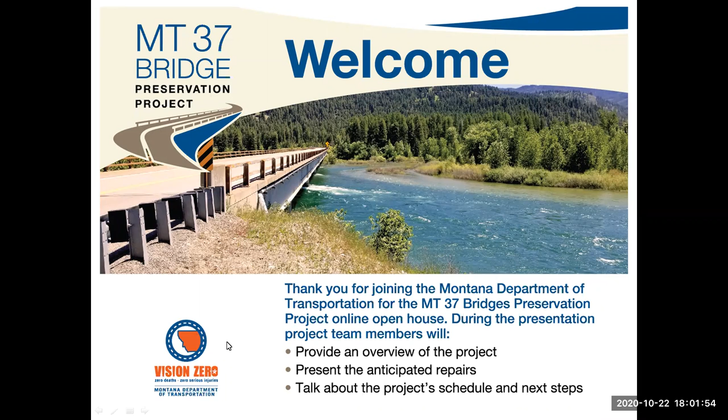Now I'm going to turn over the microphone to the MDT pre-construction engineer from the Missoula District, Jacqueline Smith. Jacqueline? Thank you, Brandon. My name, as Brandon said, is Jacqueline Smith, and I am the pre-construction engineer for the Missoula District. I'm still pretty new to this position and have a lot of learning to do, but very excited to be in this role and be part of this project. So I oversee the pre-construction program for the far western part of the state.

With me today, we have several members of the project team, which consists of MDT, Forsgren Associates, and RBCI. So I'd like to take this moment to let each person identify themselves and what their role is in the project. And then I will go into more information about the mission for MDT and why we have the team we do. So with that, I'm going to start with if the team members from MDT could identify themselves.

Sure, Jacqueline, this is Terry Voller. I work for MDT here in Helena, and I work for the Consultant Design Bureau. And my job is basically to be working with Forsgren and RBCI as a liaison with our Bridge Bureau to make sure that the consultants are giving our Bridge Bureau the product that we're looking for.

Hello, everyone. My name is Andy Carlson. I also work for MDT. I am the Missoula District Bridge Area Engineer, and my job is to just help Terry and help Forsgren make sure that the plans and specifications are to standard with MDT standards. So thank you. Thank you. And Forsgren Associates?

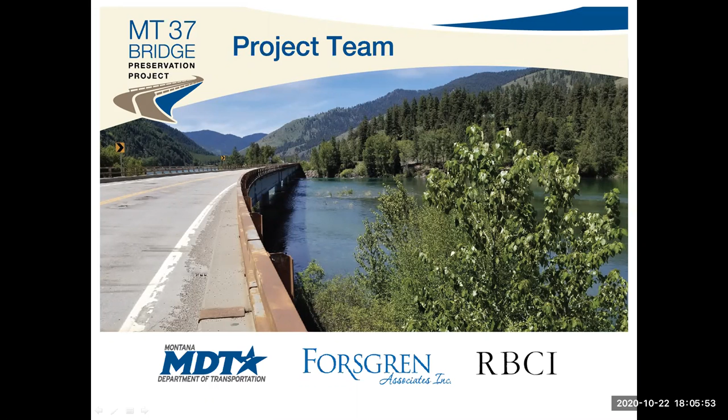With that, I'd like to move on to go into the project overview, and then I'll hand it off to Andy, who will break into more detail. Right now, we are in the early stages of evaluating 11 bridges on Montana 37 between Libby and Eureka. And when I say evaluating, we're looking at what the maintenance needs are for these bridges. They've been built ranging from 1959 to 1974. And so their needs are all different. And we need to look at each one and assess what is the most appropriate fix that's needed for them.

I want to emphasize that these bridges are completely safe to drive on. And this work is more just for routine maintenance, just like you would do with your car. You take it in for an oil change or tire rotation, and you've got your 5,000 mile check every so often, and then you've got your 100,000 mile check as well. So we're just doing our regular maintenance on them once we determine what is the most appropriate solution for them.

We have these 11 bridges, and we've included this project with another project that is south of here. It's about 2 miles south of Noxon on Highway 200. It's a separate project, and we are actually going to tie them in development and construction to see some benefits that we get when we combine projects. And that is we get reduced costs just because of the economy of scale, both with the design, development, and construction. This also allows us an opportunity to maintain consistency in construction and gives us a chance to complete construction in a quicker time frame. With that, I'm going to hand it off to Andy, and he will continue the discussion.

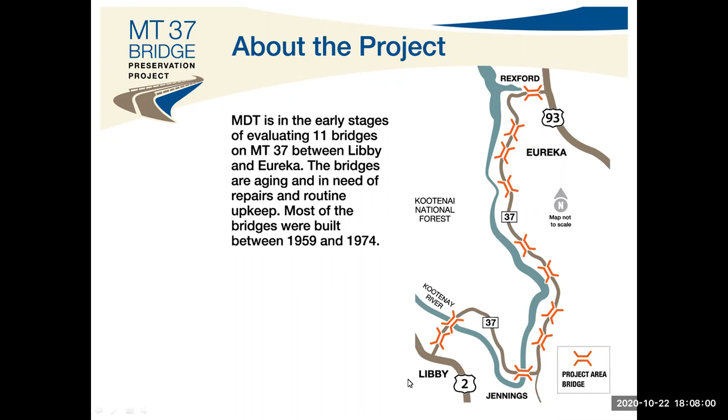Thank you, Jacqueline. Hey, everybody. I'm going to quickly walk through the project's process and anticipated schedule. It was decided to organize the project schedule and process into a two-phase approach, an evaluation phase and a design phase. The evaluation stage started earlier this year and included office and field evaluations of each bridge. All of the information from the evaluations was carefully considered to develop repair and rehabilitation needs and was documented in a draft bridge report. The intent of this public meeting is to share the findings and recommendations in the draft report with the public and request public comments.

The next step will be to finalize the bridge evaluation report. In the final report, there will be a section that documents the public comments from today and discusses any items that MDT should consider during the design process. The design phase is anticipated to start in the beginning of 2021 and is anticipated to be completed later that year. In the design phase, the construction plans will be developed. The design phase will also include an opportunity for the public to comment prior to final design. The current schedule suggests that the earliest construction could occur is in 2022. However, the funding for this project is not available in 2022, so construction will likely occur at some point beyond that.

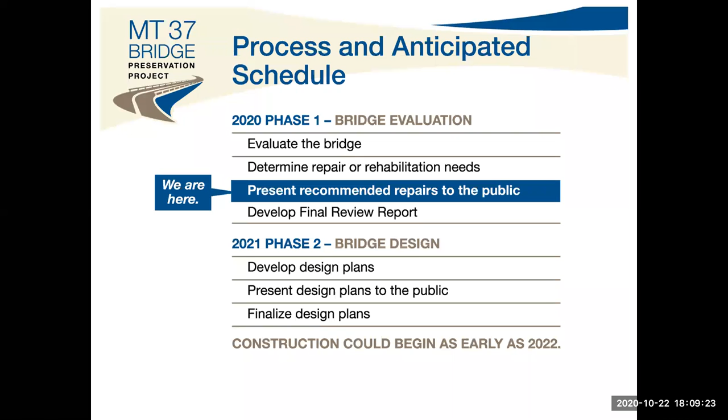All right. While I still have the stage, I also wanted to touch briefly on MDT's Bridge Bureau organization and the services we provide. The MDT Bridge Bureau is tasked with keeping Montana's bridges safe, resilient, economical, and reliable. Similar to this project's two-phase development approach, the Bridge Bureau is organized into two sections, the Bridge Management section and the Bridge Design section. MDT's Bridge Management section provides condition inspection and load rating evaluation for the 5,000 plus public bridges in the state. The Bridge Management section also evaluates and analyzes overweight permit loads and performs bridge maintenance on state-owned structures.

MDT's Bridge Design section provides design and engineering management on bridge replacement, rehabilitation, and preservation projects. The Bridge Design section also establishes and maintains design criteria and standards, participates in research projects, and promotes design initiatives to improve bridge performance and value.

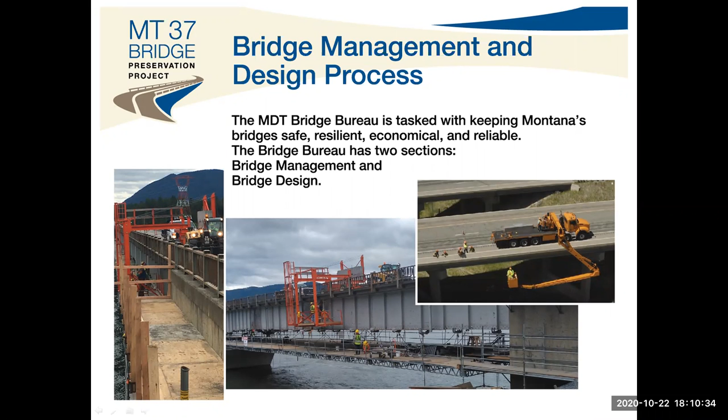Our firm was tasked with performing field visits to each of the 11 bridges on Montana 37, reviewing that field data along with other data provided by MDT, such as inspection reports, and then determining whether the bridges need a patch and overlay or a deck replacement type of repair. We are then tasked with preparing the plans package for the work to be done by a contractor.

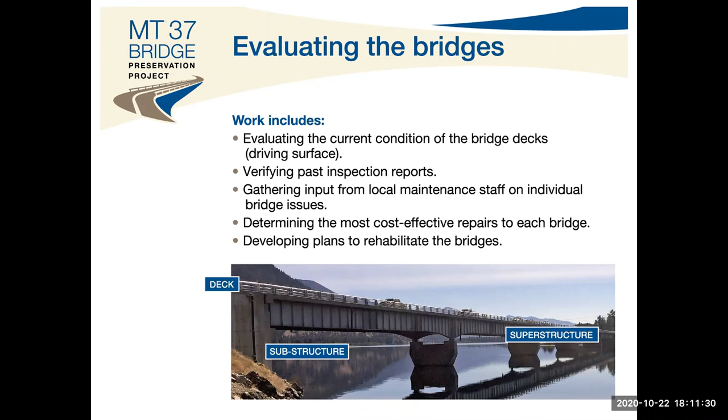So as part of the field work, our team not only looked at the bridges, but at the needed traffic control to perform the repair work, the potential environmental impacts, and if guardrail at the bridge ends may need to be repaired or replaced. So I want to describe the work involved with the two main repair types I just mentioned, a patch and overlay or deck replacement. So as we go to the next slide, we'll talk about patch and overlay.

Patch and overlay type of repair involves removing unsound concrete or concrete that is saturated with high levels of de-icing salt, which can eventually cause deterioration. We then patch needed areas and provide a concrete overlay on the entire deck area. We anticipate this work would be performed one half at a time. So work will occur in one half while traffic uses the other half, with traffic control in place to regulate vehicles across the bridge. And our traffic control engineer, Adam Bass, will go over that traffic control in a few moments.

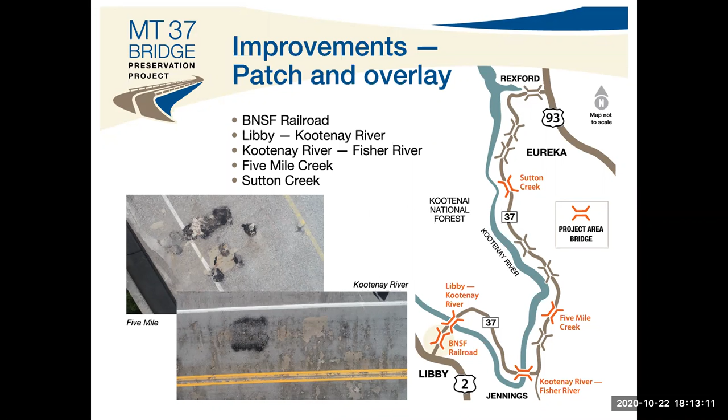So as you can see in the photos in that same slide, the concrete deck shows signs of deterioration and some previous repairs. And our review of the field data and testing shows the decks have some high chloride content in the upper levels of the concrete deck, which is a good indication that further deterioration could occur if it's not removed, patched, and overlaid. We also found the need for some bridge railings to be upgraded in some instances for safety purposes. So now we go to the next slide, talk about deck replacement.

A deck replacement is just how it sounds, a complete removal of the bridge deck and then replacing it with a new reinforced concrete deck. We anticipate work for deck replacements will be performed one half at a time, just like the patch and overlay. So again, work will occur in one half while traffic uses the other half, with traffic control in place to regulate vehicles going across it. And again, Adam will talk about that in a few moments.

Our review of the field data and testing show that the decks have high chloride content deeper into the deck on these bridges, which makes a patch and overlay unrealistic or simply more expensive than just doing a full deck replacement. Since we'll be removing the entire deck on these bridges, the existing bridge railing will be removed along with it. The new deck will have a bridge railing that's to current safety standards.

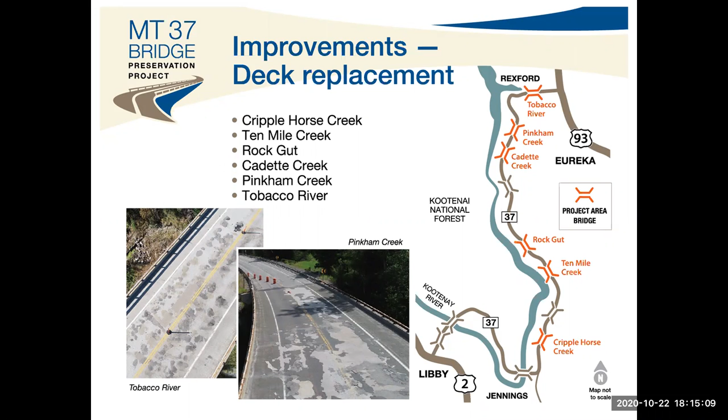Thank you, Brent. I'm Adam Bass with Forestry Associates, here to talk about the temporary traffic control during the construction of the bridges. The project team anticipates that traffic during construction of all the bridges along Montana 37 will be controlled using a two-way single lane traffic configuration. This will close one lane at a time and allow for movement of traffic in an alternating pattern.

So to do this, we will have temporary traffic signals that will be placed a distance from the work zone to safely allow movement of vehicles through the construction zone during construction operations. And as you can see at the bottom of the screen here, there are some icons or symbols that represent where the temporary traffic signals will be located in relation to the work area.

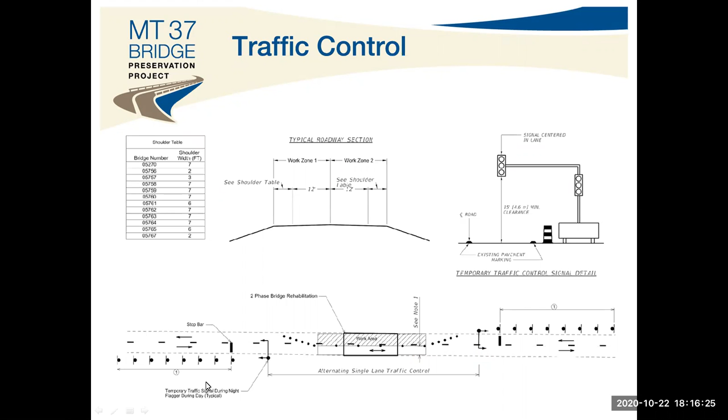So that is the application for all the bridges throughout Montana 37, but we want to address the specific bridges within Libby, since they're close together and they see a higher volume of traffic. The team anticipates working on the bridges in Libby at California Avenue, one over the BNSF rail line and the other over the Kootenay River, at the same time to reduce impacts to traffic. Access to Riverfront Park and Thomas Street, located between the bridges, will be open throughout construction.

Pedestrians will have all current access maintained with the use of a temporary crosswalk located on the north side of the Kootenay River, as indicated by the red dot there. The temporary traffic signal setup for this location is going to have 4 signals, one at each end of the construction zone, and then one at each spur between the 2 bridges. And that concludes the traffic control layout for the bridges.

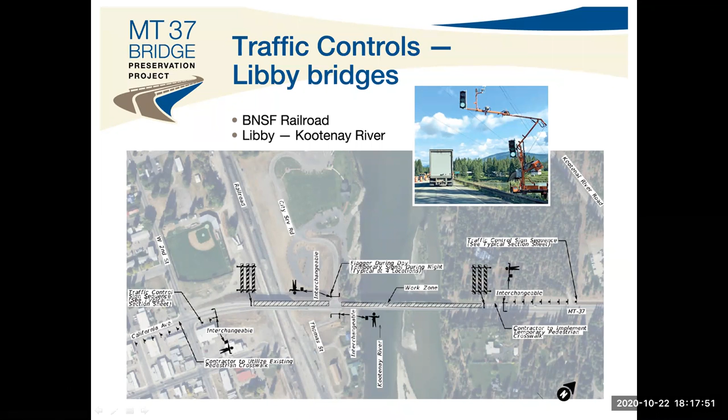I'd like to turn it over to Pat Wickman to discuss the environmental considerations for the bridges. Thank you. Thank you, Adam. My name is Pat Wickman. I work with Forestry Associates. I'm an environmental scientist, and I'll talk a little bit about the environmental portion of the project.

As part of all MDT construction projects, MDT is required to prepare an environmental study to document the effects of the action, or project in this case, on the social, economic, and natural environment. Guidance and rules for this come under the Montana Environmental Policy Act, called MEPA, and the National Environmental Policy Act, abbreviated as NEPA. NEPA is triggered when there are federal funds, which in this case may be from the Federal Highway Administration, to pay for the project. The significance of impact of the proposed action will dictate the type and magnitude of the environmental document that is prepared.

So for these bridge projects, MDT has had Forestry conduct a site investigation of each of the bridges to look for potential environmental concerns and to document the environmental baseline at each site. So we went out, we looked at the nearby waters, wetlands, river users under the bridges, bird nests on the bridges, potential for environmental contamination, such as oil spills, and the ability for wildlife to cross under each bridge, as well as potential staging area locations. This information is summarized in the MDT draft bridge report.

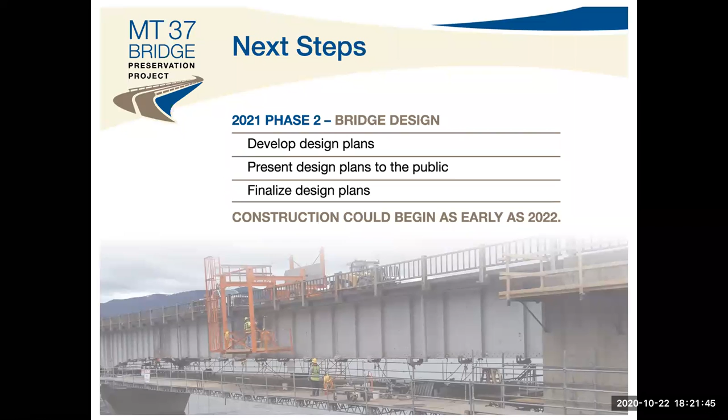As I mentioned earlier, there is an online survey posted to the project website, and that survey will allow us to gather more information both about the improvements, and we have some questions on there about best ways to communicate with you. If you have any friends or neighbors that were unable to participate in the online meeting, please direct them to the project website where they can view a recording of the presentation and take the online survey. Some of those questions on the survey include communication about design as well as how to communicate best with you during construction. So please submit your survey by November 1st.